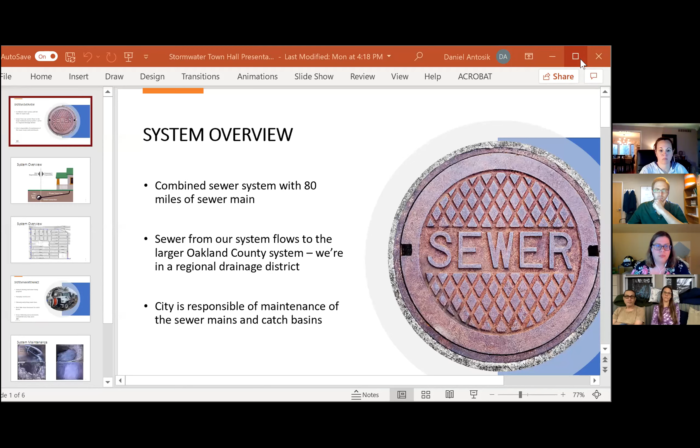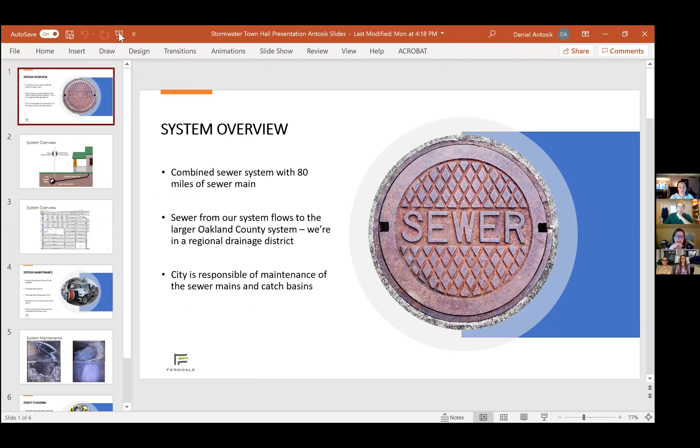As Kat said, our system is a combined system. So what does that really mean? That means that we have a system designed for both sanitary and stormwater. So everything goes into the same pipes. If we didn't have a combined system, every time you flush your toilet, it goes into one pipe. Every time it rains, that water goes into another pipe. Here in Ferndale, the way the city was built out, they all go into the same system and eventually make their way to a wastewater treatment plant.

Here in the city of Ferndale, we are 4 square miles, but we have 80 miles of sewer main. So we actually have more sewer main in the ground than we do our roads, combined between water and sewer. There's more miles of mains than there are miles of road in the city.

Our sewer system, everything that goes into our sewer system eventually makes its way to Oakland County's sewer system for our larger drainage district that we are a part of with our surrounding communities. So when it comes to stormwater, it truly is a regional deal because we're all flowing to the same place. Eventually, liquids and solids get separated, but they all make their way to the water treatment plant, which is operated by Great Lakes Water Authority, the same folks that we get our water from.

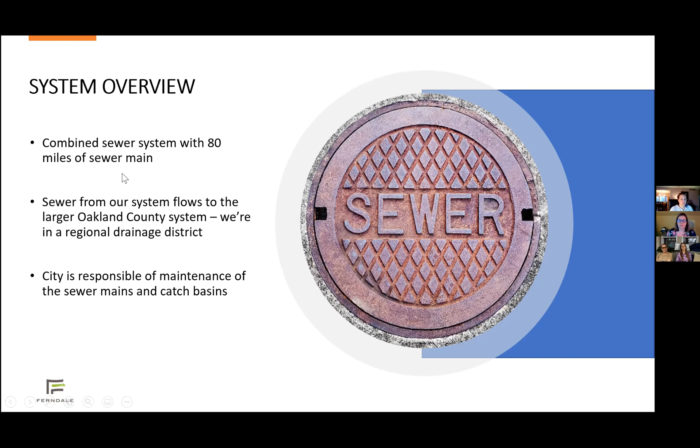Now, did you go to the second slide yet? Yeah, Dan, I was gonna say. Because I think, yeah, there you go. That outlines what you're talking about better. So I promise I was going to get to it, but sorry.

And a lot of times we get phone calls at the DPW that may not be connected to street flooding. Well, I'm having a backup in my basement, and 9 times out of 10, our response is going to be, I have no one else in the area that's reporting this. This is likely an issue with your private service line. And 9 times out of 10, that's what's going on,

because these underground things that are all over the city are things that we take for granted because we don't see them. You flush the toilet and they work. And it's when they're not working that the issue comes about. And most residents really aren't aware of that distinction of responsibility. And it's an important thing to know.

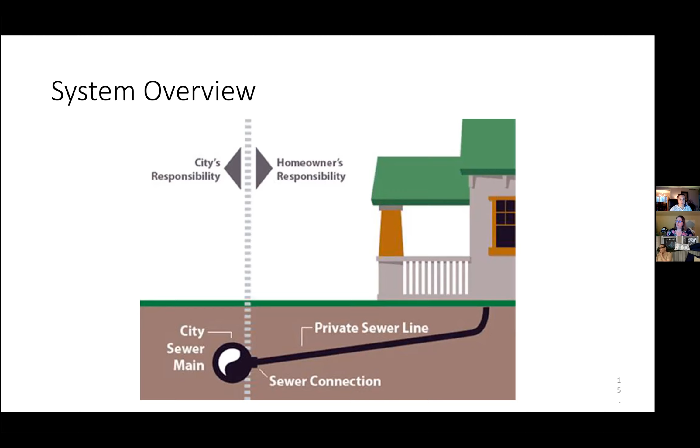And everything flows into these sewers. Now, these are large sewers. These are 9-foot in diameter sewers, 7-foot in diameter sewers. So when it's rainy and people are doing laundry and using the restroom, they get quite full. But on a normal day, it's more so business as usual with a light flow.

But everything from the city of Ferndale eventually makes its way to the Kuhn drainage system, which is located at 12 Mile and 75 behind Home Depot. It's a giant multi-million gallon underground system where all of our larger drainage districts, water, stormwater, and wastewater go. So when I say that larger drainage district, it's us down in Ferndale all the way up to Birmingham and our neighboring communities to either side of us.

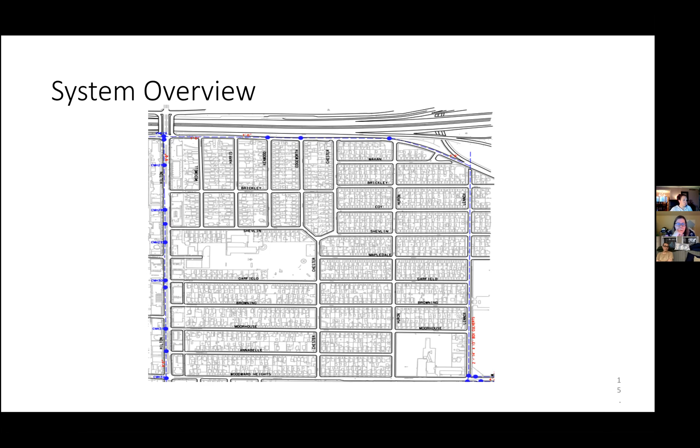And then when it comes to the maintenance of the system, like I touched on a little bit earlier, and we'll get to later on in this meeting, is the system maintenance. So, what does the city do? The city has an annual program that, internally at the DPW, we call CIPP. Everyone's cool, more government acronyms. That's cured in place pipe. So what we do each year is we line sewers. So some of you may live on a street where we completely replace the sewer main. Well, or not sewer main, but water main, I should say.

Well, sewer's a little bit different because we can actually line that. So what do we do? We clean and then we line, and think of the lining as you put a giant tube sock into the sewer, you heat it up with warm water, and it turns into a plastic liner within the sewer itself. So every year we're doing a few thousand linear feet of cleaning sewers and lining sewers.

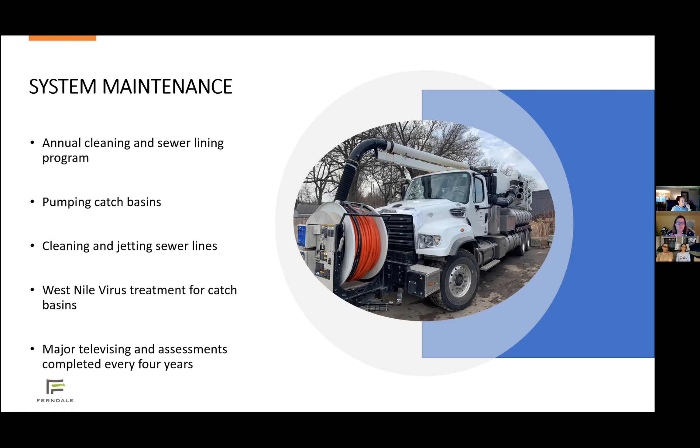And that helps us identify troublesome areas that maybe need a repair in the main itself, and which ones are potentially troublesome that we want to get lined sooner rather than later. So that major televising and assessment that we complete on an every 4 to 5 year basis helps us dictate our work in between that time frame.

Now, we're able to do removals of this sewer snake that's caught in our main, but it can be a little bit pricey because our contractor sends a small robot down into the sewer that actually cuts this sewer snake out. And we'll let you know, like, hey, there's a sewer snake stuck in your lead. But after we've removed it from the city main, that's not our responsibility anymore because of that diagram that I showed you earlier.

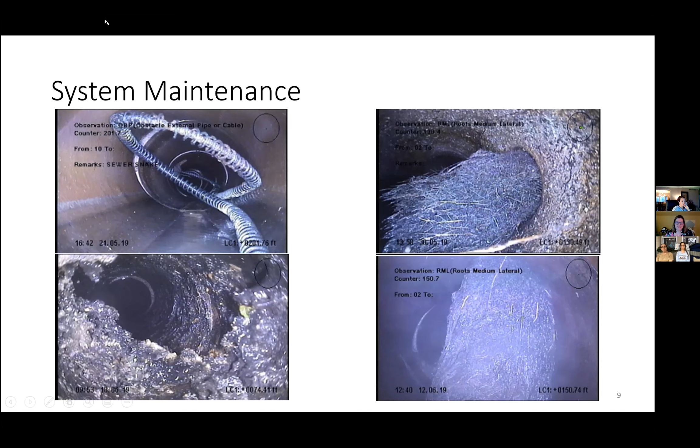And these roots, wherever they're going to grow, they're going to grow. And when they're finding those nutrients from your sewer lead, they're going to thrive there and become little bushy root balls in your sewer lead overall. So I think that is the extent of this portion of our system overview and actual maintenance that the city does for our sewer mains. So this is a good segue into some of the things that homeowners can do.

I've had the type of backup that is suggested by some of the photos on that last slide, where either tree roots have overrun my line, or other obstructions. There are products available at hardware stores, like these root killers that you can flush down into your system. I can't really comment on the efficacy of those. I've used them before, but as a homeowner, what I would strongly suggest based on my experience is annually, or at least every other year, having a plumber actually snake it or jet it.

If you have trees that go relatively close to your line, or if you've experienced small backups in your basement, regular line maintenance really mitigates that. I've lived in my house since I was a second year law student, and I'll tell you that those first couple of years we maintained nothing. We definitely had some backups as a result of that. Now that we've gotten on a more regular cleaning schedule, it's really improved those kinds of things.

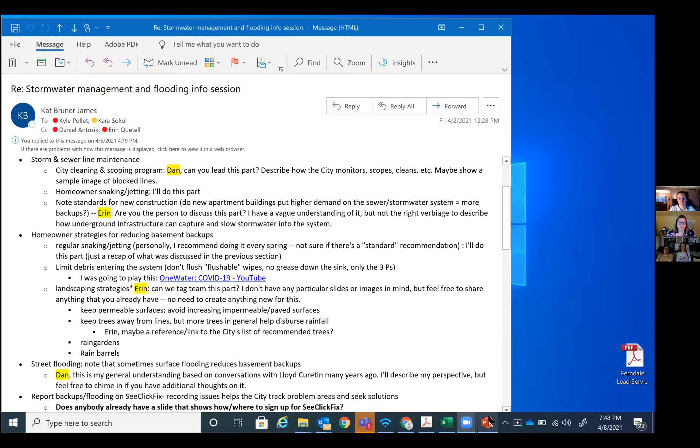So let me share my screen again. Where did my PowerPoint go? Hold with me. Can we see it? Yep. Okay, so get back where I needed to be.

Here we go. So street flooding. Most people are not a fan of their street being flooded. I would beg to differ with you on that one. And like Councilperson Bruner James touched on, sometimes that street flooding is because there's debris covering the catch basin. Now, we will come and clean that debris off so we can get water flowing again.

But if you're feeling froggy and you got some nice rain boots and a nice rain jacket, a rake is what I would always recommend. A sturdy metal rake, you can scrape that grate off and that water will begin to flow again. The one thing I will say is look both ways for cars, because they do not care when they're driving down the road that they're going to splash you with water. It is a reality. So just be aware if you do want to take that route.

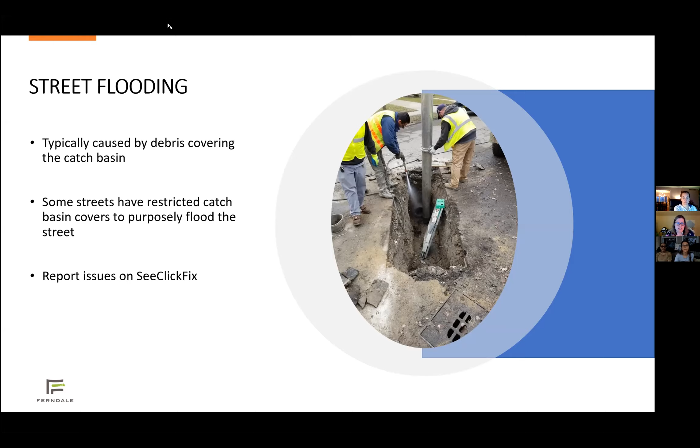So I just want to jump in really quickly and say, if you've never heard of SeeClickFix, if you're not familiar with that, there's both a free app that you can download on a smartphone, or on any computer you can go to SeeClickFix.com, log in and alert the city to an issue.

And of course, you may call DPW, that's the traditional way of notifying them. But I do encourage using SeeClickFix because it helps capture the data in such a way that I think helps spot clusters of issues, and potentially get on top of long-term issues and solutions.

And then the last thing I want to say, and then I do want to be able to field some questions, is that I talked to our state rep, Regina Weiss, this week. And while we can't afford to replace and upgrade every sewer main in the city, we are doing the cured-in-place pipe and cleaning and jetting and so forth. But there may be some hope on the horizon for additional improvements.